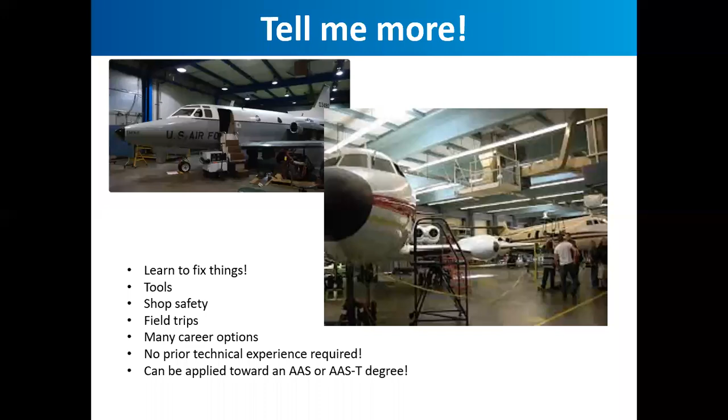No prior technical experience is required. We teach you everything you need to know. I'm a great example of that. I didn't really know that much about working on anything. I never worked on my car very much when I went into the program. I just knew I liked airplanes a lot, and I signed up for the first class and fell in love with it, and I've been doing it ever since. And we teach you everything you need to know. And this experience can be applied toward an AAS or AAS-T degree, as I mentioned before.

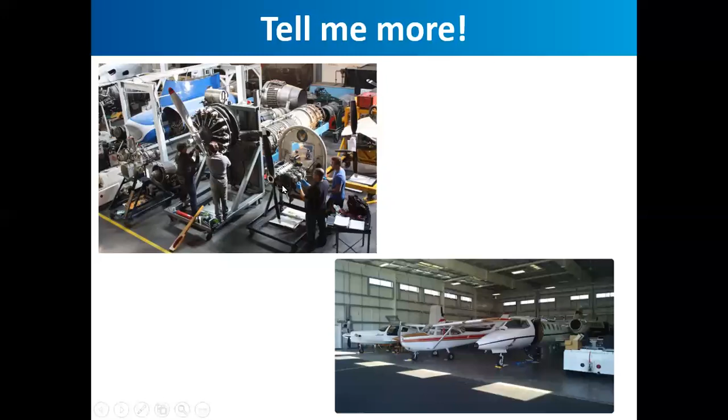Here's a couple of examples of what our shop looks like. The picture on the left is some of our engines. The students get to put their hands on running engines. They do the maintenance on them, the inspections, the service. They push them outside, start them up, and make some noise. If things don't work, then we troubleshoot it and find out what's wrong with it, and then we fix it.

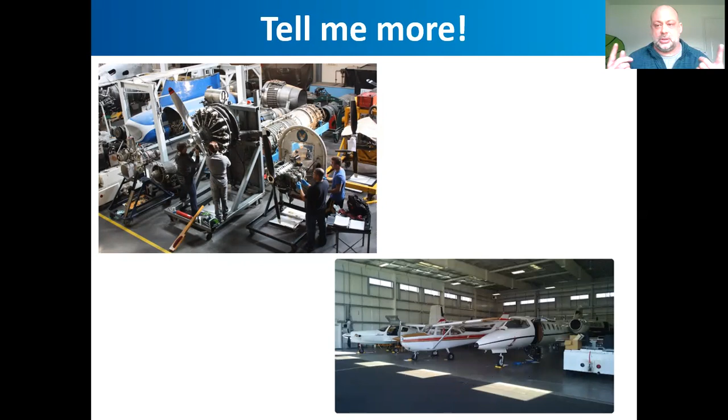The picture down on the lower right is a picture of our Boeing field facility. We have about 6 airplanes down there. Most of them are in running condition. The students are responsible for maintaining them, inspecting them, servicing them, pushing them outside on the ramp, and starting up the engines, making sure all the systems work.

A little bit more about the program - the day in the life of a student in the program. When you're there, it's a full-time college level intensive program. We have a lot of information we need to impart on you, to deliver to you in a 2-year period, so that makes for some pretty long days. Our program either runs 7 a.m. to 1 p.m., or we have an evening class from 2 p.m. to 8 p.m. It is a 17 credit class, runs about 9 weeks every quarter, so we get about 3 to 4 weeks off between quarters.

We do run through the summertime. It's 8 quarters over 2 years, 4 quarters a year, so we run through the summertime.

The average week is about 1 to 2 days of lecture or discussion in the classroom, talking about whatever subject we're covering that week. We usually break things down into bite-sized week-long segments, so we cover one section for about a week, test you on it, then move to the next section. You'll spend 1 to 2 days in the classroom and 3 to 4 days in the shop working with the tools, equipment, airplanes, engines, and apparatus. We have tests about every week or so.

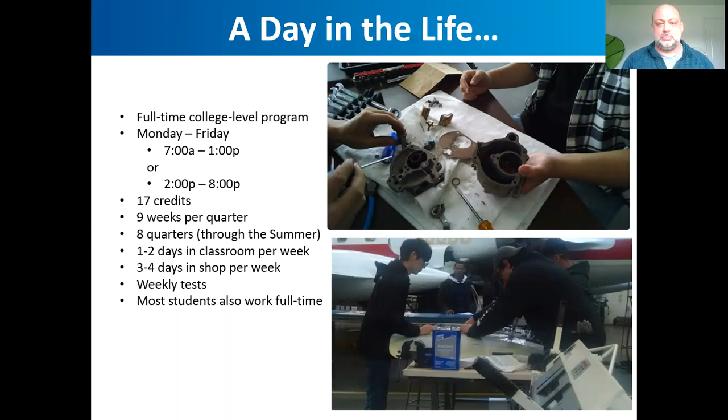There's a lot that happens just in your first quarter. Then you move on to AMT 112, which is all electricity, all day, all the time. So if you don't know anything about electricity, you will after this class.

We start with the basics of what electricity is, some basic terms and concepts, and then build upon those so you can go from knowing nothing about electricity to being able to read a wiring diagram, troubleshoot a circuit, use the multimeter and other tools, and fix an electrical system on an aircraft. You'll be able to remove and install components, replace wiring, and install wiring, following standard practices for wiring as it applies to aviation and aircraft.

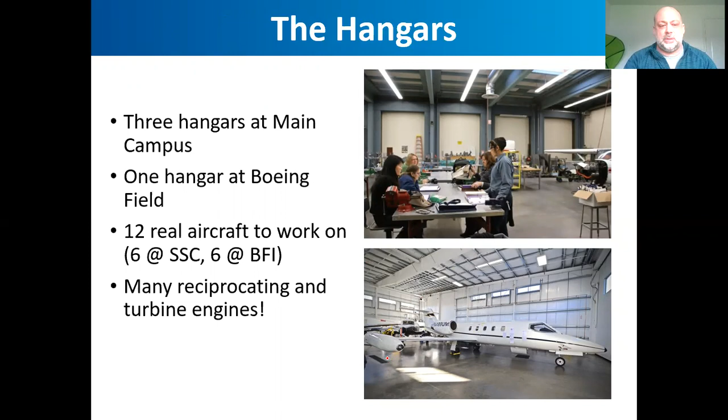We have 6 more airplanes down at Boeing Field, most of which are in running condition. We try to keep them that way, and we use the students to keep them in running condition. We put you to work. And then we have a whole hangar full of reciprocating and turbine engines, which you work on in your power plant classes.

We have a quite experienced cadre of instructors, most of whom have some industry experience, myself included. We are all licensed A&P mechanics. Some of our instructors have come from the airlines. One of our instructors was a mechanic at United Airlines for 20 years. I was in general aviation for 7 years, working at Ace Aviation in Renton Airport. One of our newer instructors has been working on corporate aircraft and was an instructor at Everett Community College's A&P school for a while, and he just moved down here.

We also have IBEST support, which is, I can't remember what it stands for, Basic Education something. I'm sorry, I can't remember what it stands for, but it's basically a second instructor in the class for the 111 and 112, the first 2 classes, that helps students with study habits, some of the vocabulary. Because there's such a large volume of information in the first 2 classes, there's a second instructor in there who helps the students process all that information, form study groups, form study habits, to help them succeed. And we've seen a really large positive feedback from having the IBEST support in our classes.

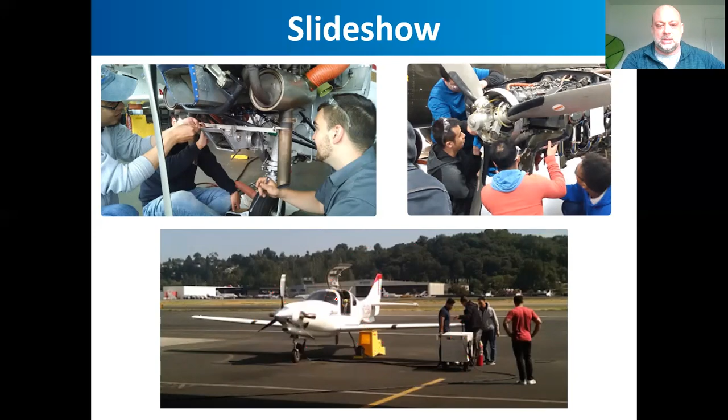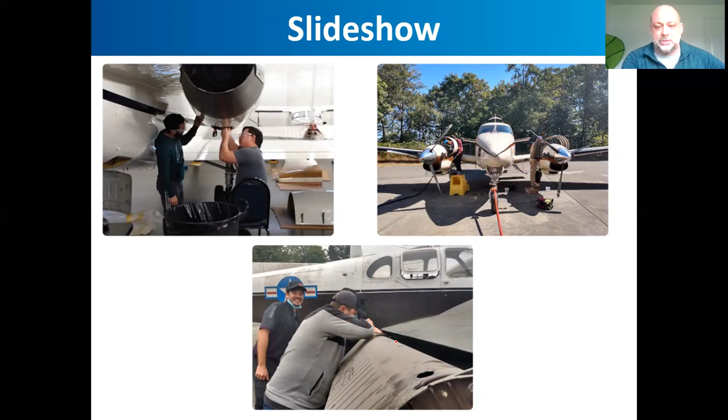There are some engines students up on the top left servicing the ignition system for the Learjet that we have down at Boeing Field. On the right, students are inspecting the fuel systems for the 2 PT6 turboprops on our King Air, which both run. Down in the middle on the bottom, our students are installing and rigging the flaps on one of our 2 Beechcraft twin Bonanzas.

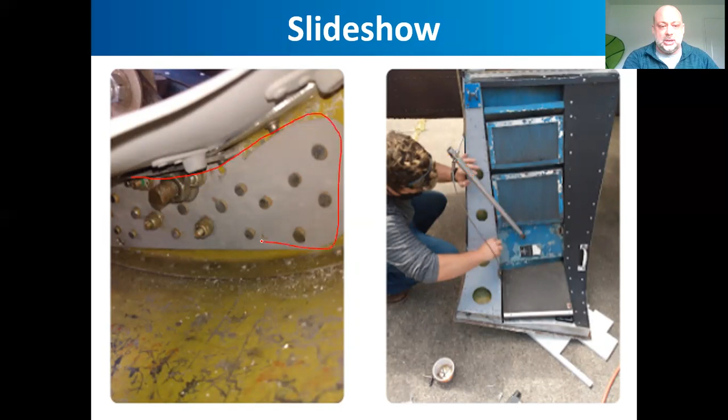This is an example of a sheet metal repair that 2 of the students did to one of the doors. This cable that this rod is connected to pulled out of the door, and the door failed basically, it came apart. The students were able to fabricate this piece right here out of just plain old aluminum. They took a piece of stock aluminum, bent it, heat treated it, installed it, and fixed the door.

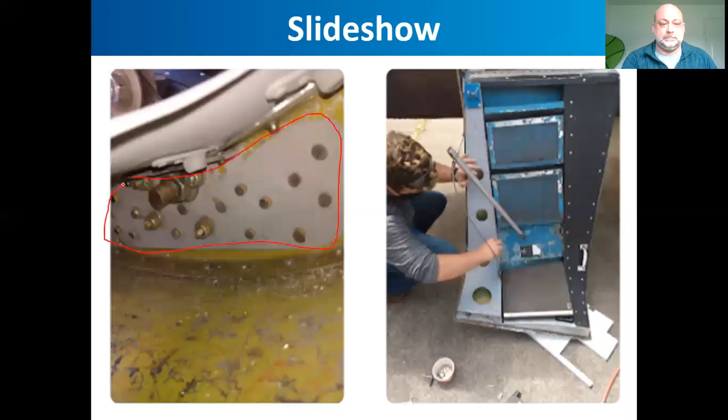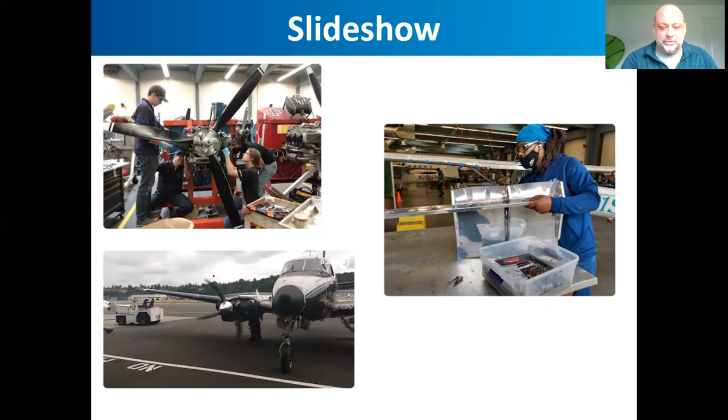Down on the left, lower left, is an engine that had been sitting for years, hadn't been run for years, and the students went through the work to inspect it, service it, leak check, function check it, to make sure that the ignition systems, oil systems, and the fuel systems all worked properly. They pushed it outside, and it started up and ran beautifully, first time in years. Students did that.

And here's some more students fabricating another aileron section. So doesn't that look like fun?